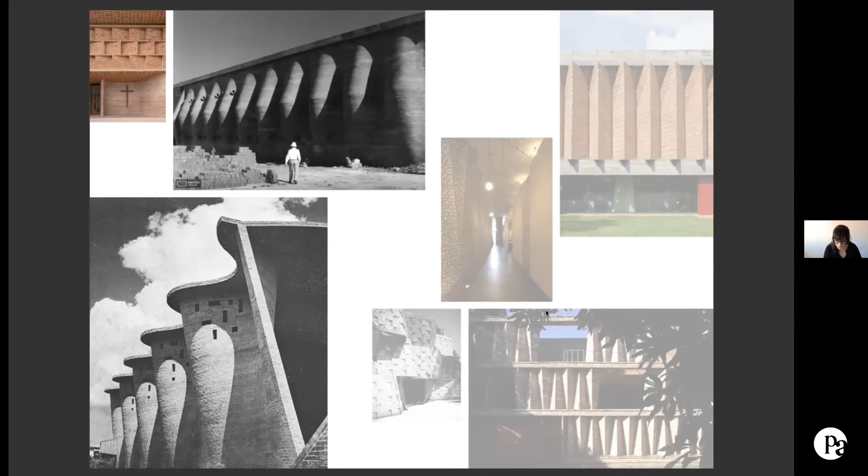...Benitez and Cabral prefer folded walls made with rectangular, triangular, or trapezoidal panels prefabricated with shiner brick. Dieste's curved planes are load-bearing, whereas the pleated plates of Benitez and Cabral are veneer masonry for concrete structures or internal walls that divide spaces. Examples include the pre-molded plates of the inner courtyard at the Center for Retired Banking Employees of Paraguay, the internal zigzag wall of the Unilever headquarters, the contrasting folds on the facade of Smeraldina House and on the corridor of Lazanita's house, or yet the pleated closure of the hydrotherapy building at the Teletón Children's Rehabilitation Center.

Throughout more than 50 years of work, Dieste designed and calculated a large number of curved and folded elements in reinforced ceramics to overcome large spans and cover ground floor buildings.

Except for the folded plates that cover the San Pedro Church in Durazno, most of these roofs are self-supporting shells with double curved walls, as those of the church in Atlântida.

Others have sheds that cover the producers' pavilions at the Ceasa Market in Porto Alegre, or barrel vaults as those of the Merchants Pavilion, and ones supported by central pillars of the portico at Ceasa and at the Salto Municipal Bus Terminal.

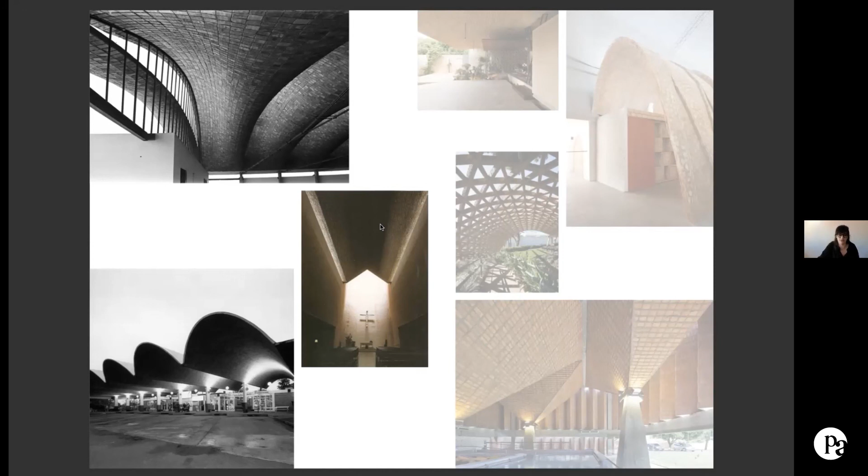There are at least three types of roofing in Benitez and Cabral projects: the flat or slightly curved slabs, as the concave with tilted bricks at the Buffon House, and those with broken bricks from Teleton.

The vaulted roofs, whose section is usually an arc that moves in one direction, include prefabricated triangular elements that cover the access and front gardens, or cast-in-place concrete and pieces of brick inside the physical therapy block at Teleton. Finally, the folded type, as the inverted pyramids at the same project.

The brick is shattered to cover the base of the wooden molds that shape the concrete, plays the role of light aggregate in the hollow core slabs, or appears in precast elements that work as permanent mold for concrete on coffered slabs and curved roofs.

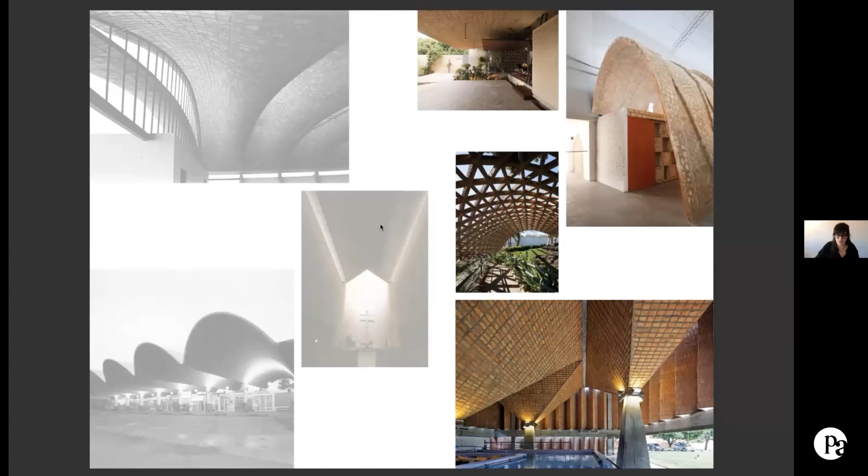Unlike ceramic cobogós, in which the grid is made with pieces manufactured for this purpose, in the Dieste and Benitez Cabral projects, the voided surfaces are made with common brick.

In some cases, the opening grain is given by the size of the brick. In others, the grain results from combining bricks with elements of different geometries, usually prefabricated on the construction site.

In addition to controlling visual permeability and sunlight incidence in interior spaces, this plastic operation highlights the countless possibilities of brick.

Except for the lancet window of the church in Durazno, the voided surfaces stand out in Dieste's production when it comes to reservoir towers, bells, and communication equipment.

In this case, these perforations are not just plastic operations, but have at least one important practical function in minimizing the impact of winds on the structural system of the towers.

In the cylinders and truncated cones, the suppression of ceramic elements makes even more evident the fine grain of the handmade work of brick bonding.

In the pavilion buildings, Dieste prefers large opaque ceramic planes that let light in through small perforations or narrow openings, as the gap between the pleated surfaces covering the San Pedro Church, or the small rectangles on the wave side walls and inclined panels of the main facade of Cristo Obrero Church.

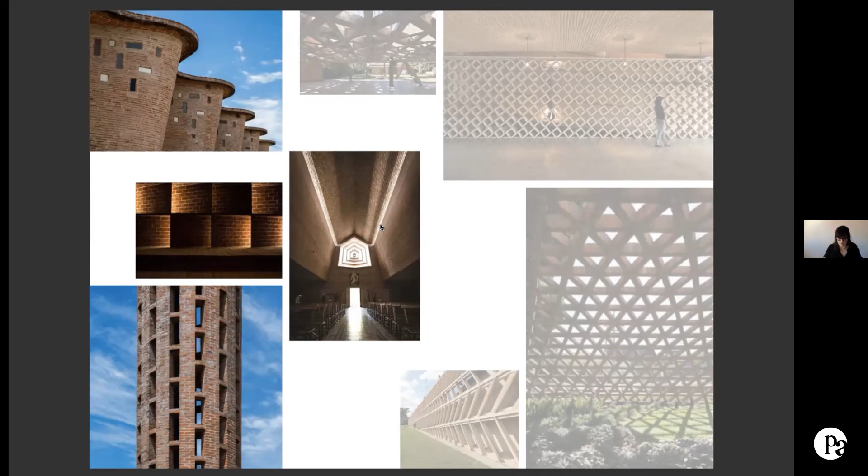On the other hand, Benitez and Cabral prefer uniform grids of small prefabricated brick elements, as the large lattice that covered the longitudinal facades of the Unilever building, the wall separating the ramp from the living room at the Buffon House, and the two voided vaulted structures at Teleton.

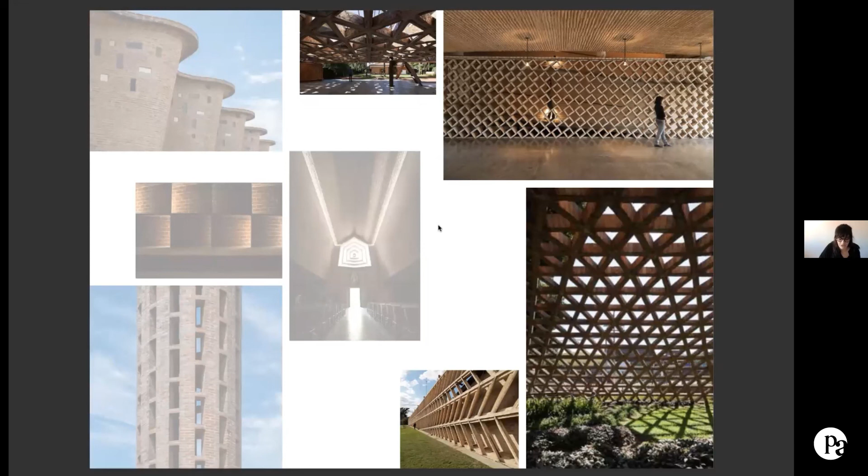The extensive use of folded and curved walls and roofs makes clear Benitez and Cabral's intention to achieve structural system stability by shape, in an effort to overcome construction limitations of brick and optimize material resources—a clear reference to Dieste's practice based on the relationship between geometry and material resistance.

However, despite the similarity in the use of brick in complex and unusual composition operations and structural systems, they differ mainly in the typologies of buildings, geometrical procedures, and structural calculation methodology.

Most of Dieste's work are pavilions for factories, churches, gymnasiums, warehouses, shopping malls, and other programs consistent with long spans covered by reinforced ceramic roofs. The work of Gabinete de Arquitetura includes houses and institutional buildings that reach up to four floors.

While Dieste concentrated his efforts on the use of reinforced ceramic in self-supporting shells, Benítez and Cabral make extensive use of concrete. In a few buildings of Gabinete de Arquitetura, the brick has a structural role in load-bearing walls.

In others, it is a simple veneer masonry. However, in most of them, the brick works as a complement to concrete structures, acting as light aggregate, as permanent formwork, or still helping to resist compression efforts.

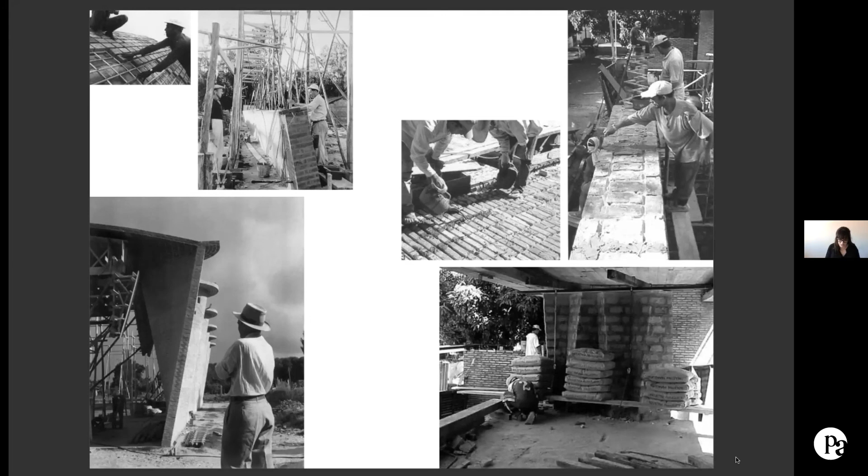While Dieste uses the full-sized stretcher or shiner brick, Benítez and Cabral often tilt it, break it in half, or smash it, and lay it with generous joints of protruding mortar.

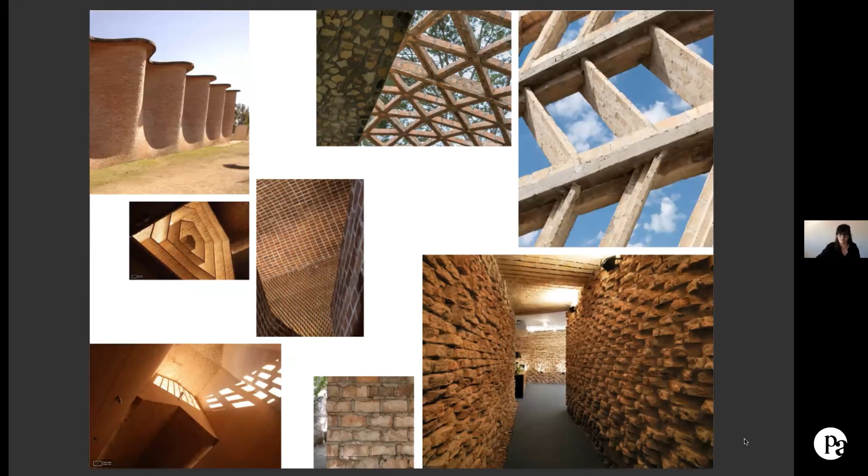Benítez studied architecture in the 80s. While in some countries of Latin America, such as Brazil and Chile, this was a period of positive review of the modern movement by specialized critics, in Paraguay this decade was the culmination of the crisis of modern architecture, which was already sparsely represented in the country. So for architects who graduated in Paraguay in the 80s, the modern source was much more in foreign productions than in works built locally.

Although it's possible to point out Dieste's reference to the work of Benítez and Cabral, probably the main similarity lies in the confidence placed in the potential of ceramic brick and the desire to break the technical limitations of this popular, cheap, and widely known material, taking from it its under-suspicion status and giving it the possibility to shape plastically expressive architectural elements in which it does not usually appear.

Moreover, the dissimilarities, instead of putting one production in opposition to the other, evidence the inclusiveness and diversity of modern architecture, a formal system that still admits expansion.

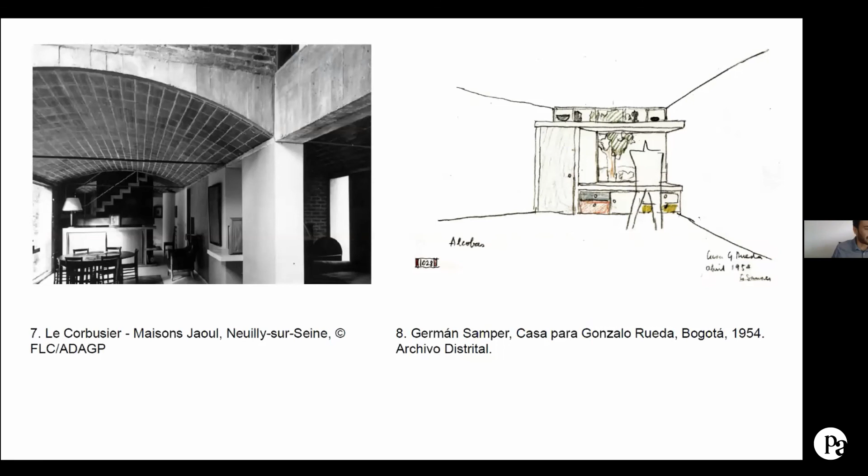Samper studied architecture in the newly built Faculty of Architecture of the Universidad Nacional in Bogotá, the White City, as it was popularly known, designed by German architect Leopold Rother, who was also one of his teachers. Of great influence was also another of his teachers, Gabriel Serrano, a prolific architect and engineer who maybe also taught him learning architecture through drawing.

Serrano made a trip to Brazil to learn from its modern architecture in 1948, bringing with him even a Portinari tile mural. His article published in Proa in 1948 shows his observations and learnings in a sort of Corbusian way.

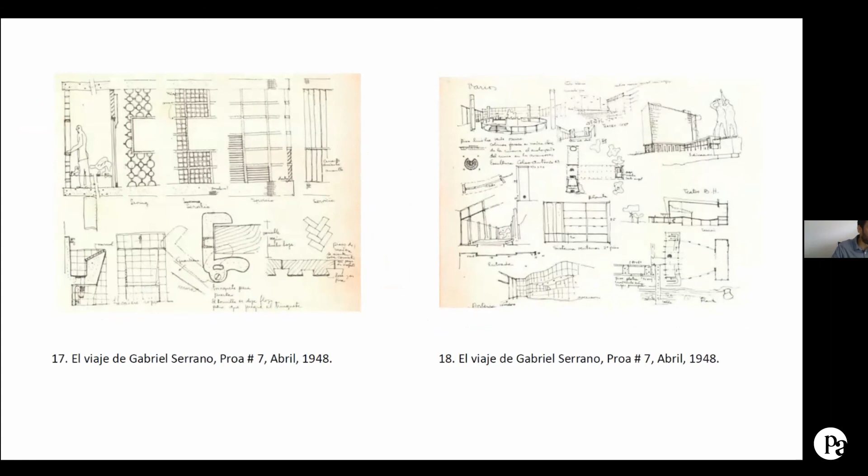This was also a time of the riots in Bogotá after the murder of populist leader Jorge Eliécer Gaitán on the 9th of April, 1948, and also the time of Le Corbusier's urban planning for Bogotá.

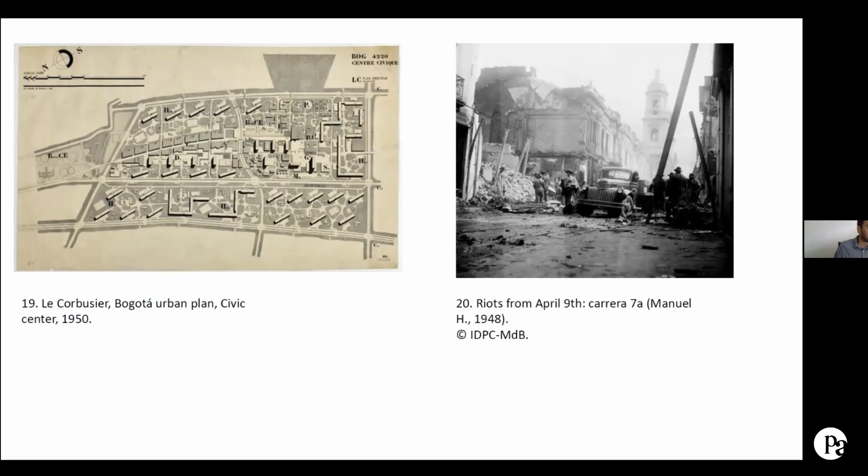One can see a very rigorous application of Serrano's method from his arrival in Paris and throughout his more than 1,000 drawings made during his stay in Le Corbusier's atelier.

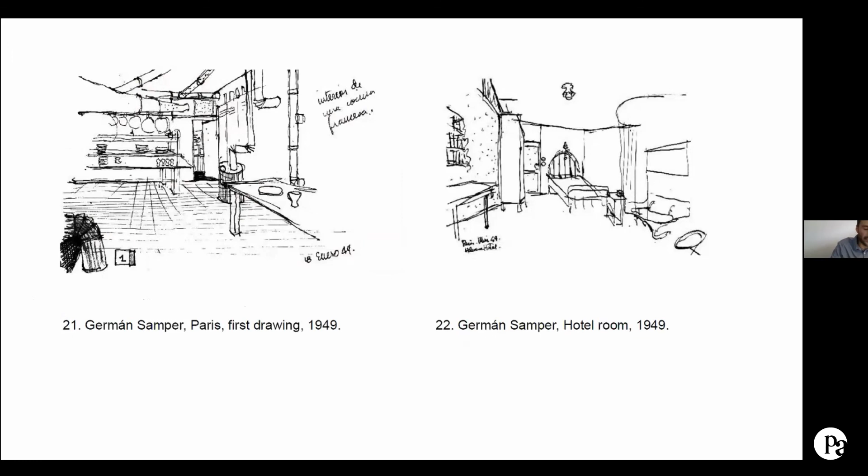Before his acceptance in the Atelier Rue de Sèvres, he met Rogelio Salmona and Georges Candilis, to whom he volunteered in the preparation of the CIAM in Bergamo, led by ASCORAL, or the French CIAM.

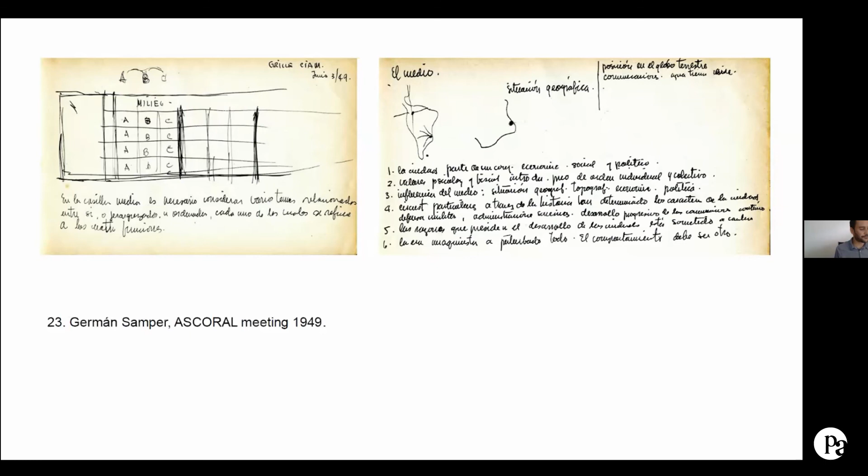In this image, we can see Samper drawing the Congress template in his notebooks, centered on architecture's relation to its milieu, or environment, and Samper making his approximation from South America. This was the introduction of the term habitat in CIAM's vocabulary.

But with an abundance of drawings, after his return from Europe, he chooses to publish the ones from his honeymoon trip to the Balearic Islands. In his article, he focuses on the courtyard or patio of traditional houses, as can be seen in these intermediate spaces of Ibizan farms. And in his text he starts by saying, the real interest lies in peasant architecture.

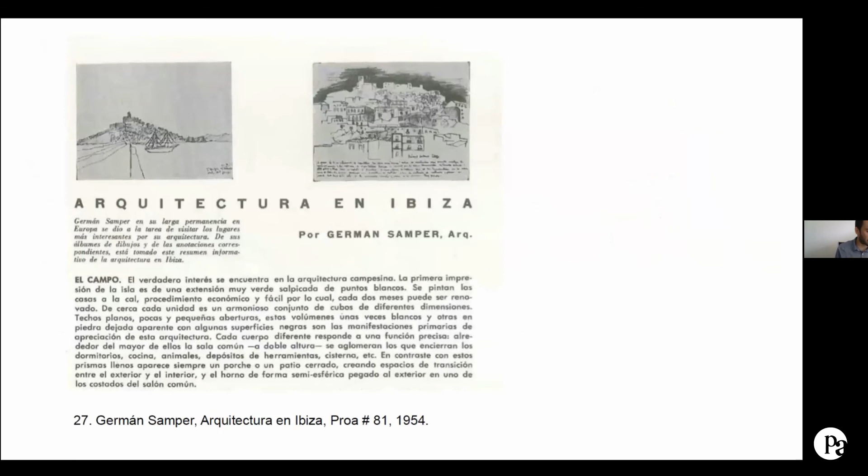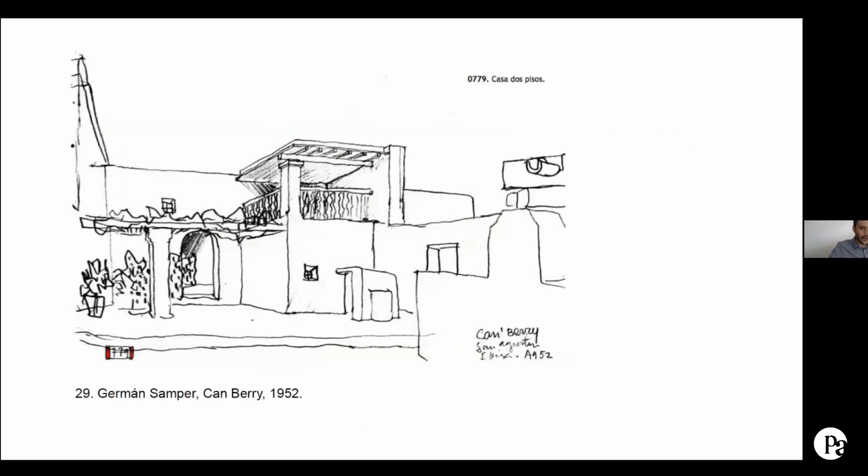This is a larger image from one of the Ibizan courtyard houses called Can Berry. And here, Can Berry, and here we can see the town where he stayed, named San Agustín, and the house where the couple stayed for 2 months, whose owner was Magdalena.

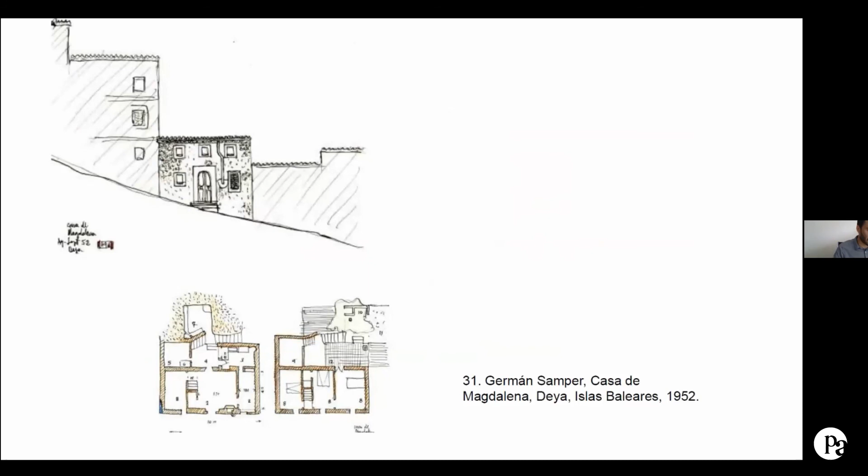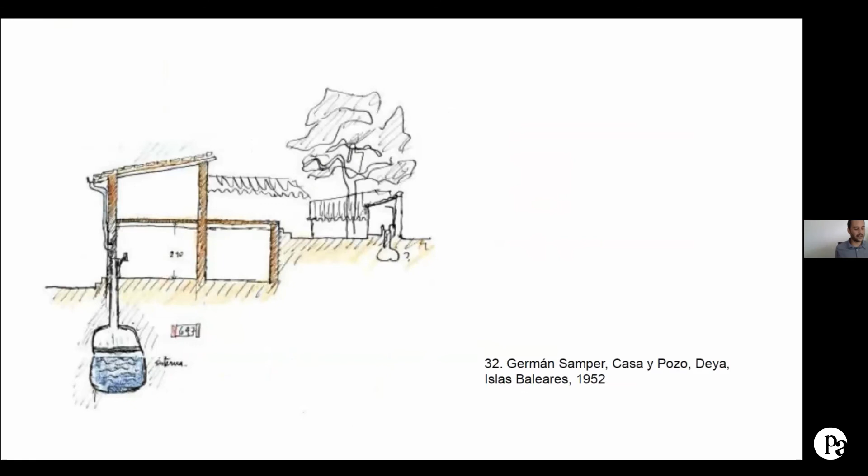He also points out that it was José, the bricklayer, who explains to him that the house begins with the water well. This is a great lesson in sustainability, which was ahead of its time.

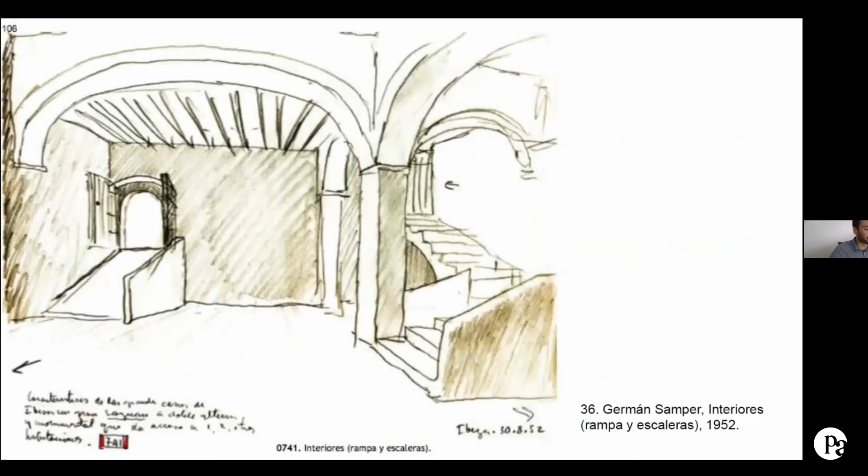But also the house relationship to its immediate surroundings and ways of communication. This here, marked D, is a street and is a way of communicating. It's not the sea, like maybe you think.

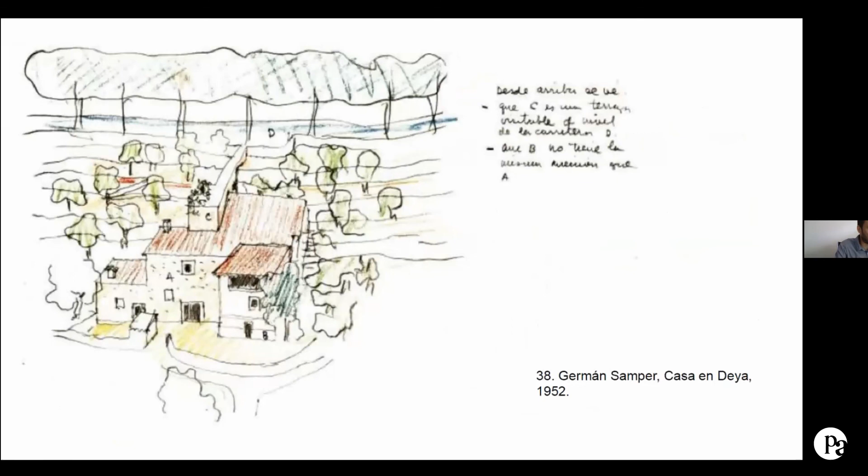At his return to Bogota in 1954, Samper designed this collective housing for the Banco Central Hipotecario in Cúcuta.

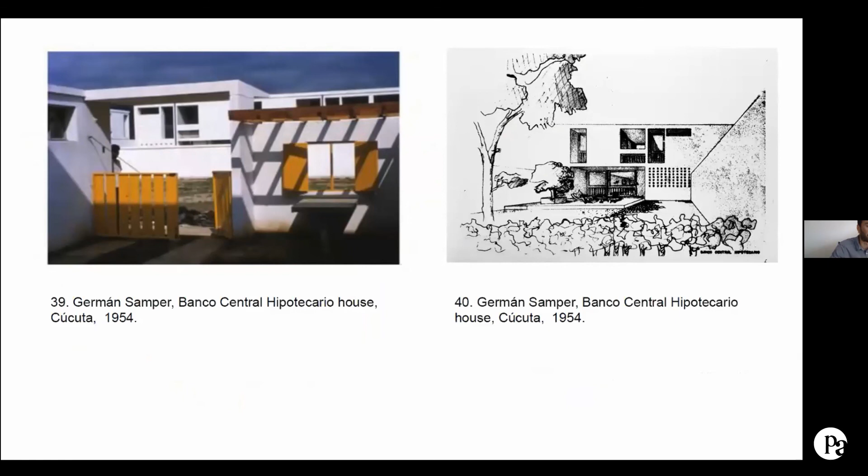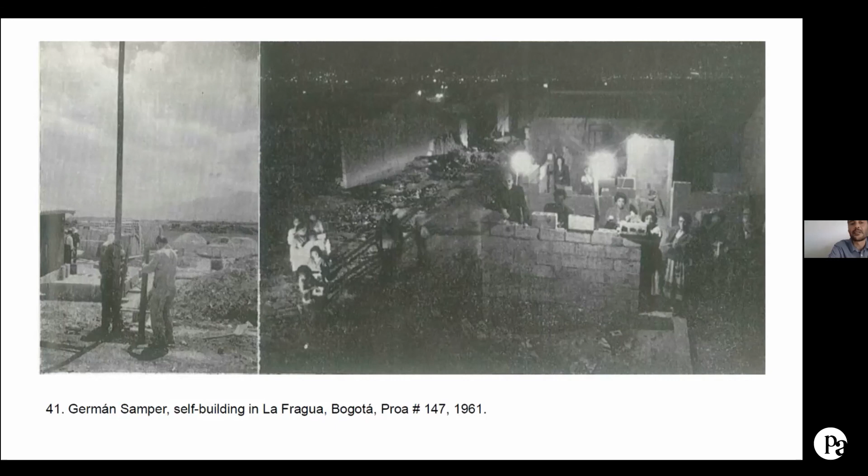The self-building project La Fragua in Bogota began in 1956 with the idea of Samper and his wife, to make organized and owned tenant houses with a maximum area of 30 square meters. In 1958, Angel Maria Lopez, the family's driver, asked the couple to help build his own house, and they told him to get other families interested also in self-building, and they made a solidarity construction during weekends and nights.

The urban approach to La Fragua begins with breaking up the monotonous row houses to generate unity in variety. Paired houses rotate in different positions, allowing intermediate spaces to evolve, gradually reducing the road sections from motorways to pedestrian paths and small plazas.

The sections between houses in this drawing are 8, 5, and 3, but afterwards in the Proa magazines, the distances between houses are 5 and 3.5 meters.

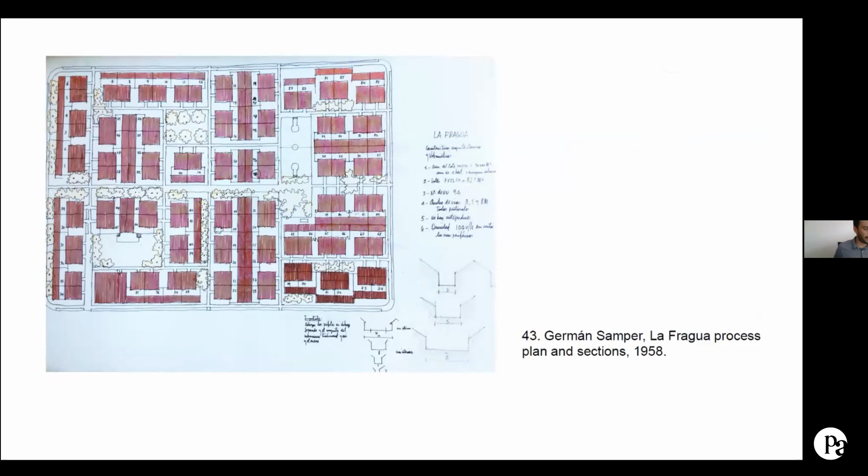The houses have 2 entries, one for the household and another for a free development, workshop, or renting space.

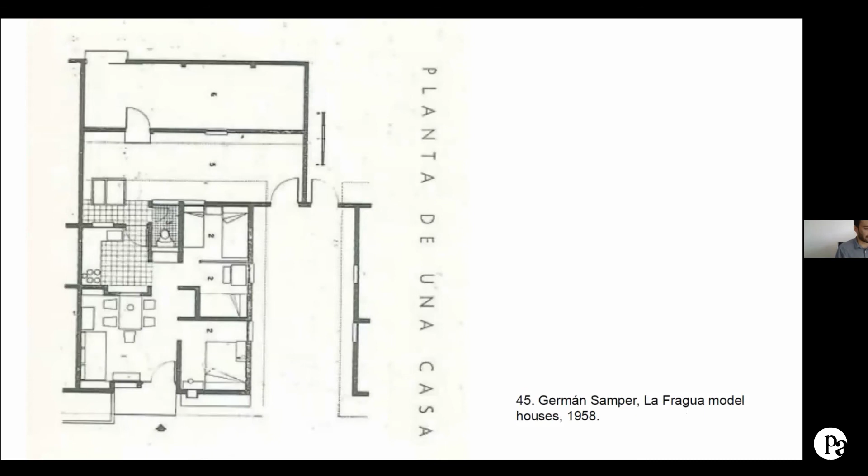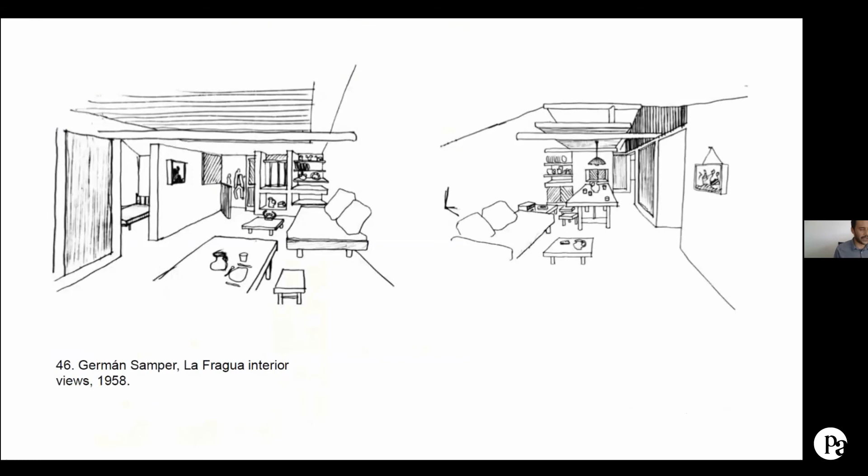The facade is an in-between space in itself. Outside there is a bench, an entry platform, a tripod, and a window. Inside, the facade becomes a shelf, and there is even a half-closed door or an intermediate door - I don't know how to call it.

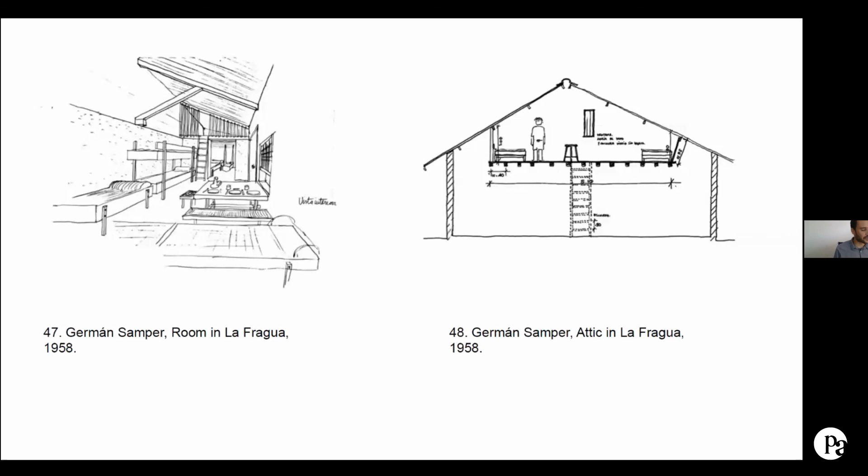The attic is another intermediate space, perhaps of great symbolic importance as a receptacle for creativity. Finally, we see the backyard serving as a connection between the houses and their surroundings. This here is a workshop, and this here can be a classroom.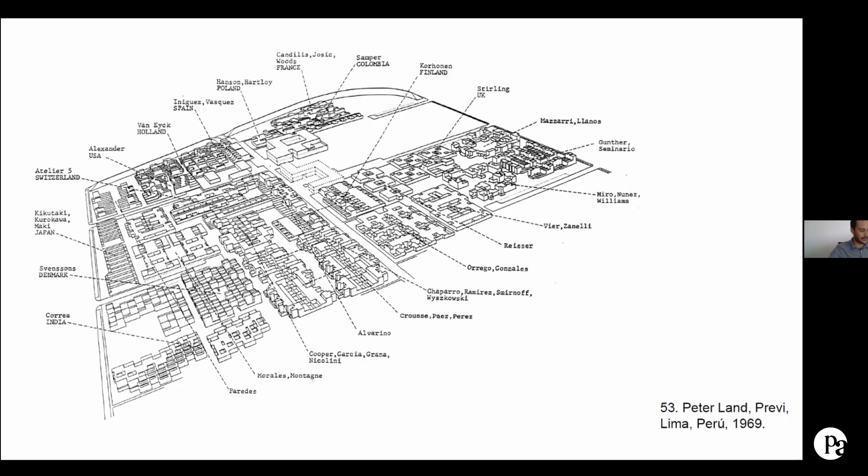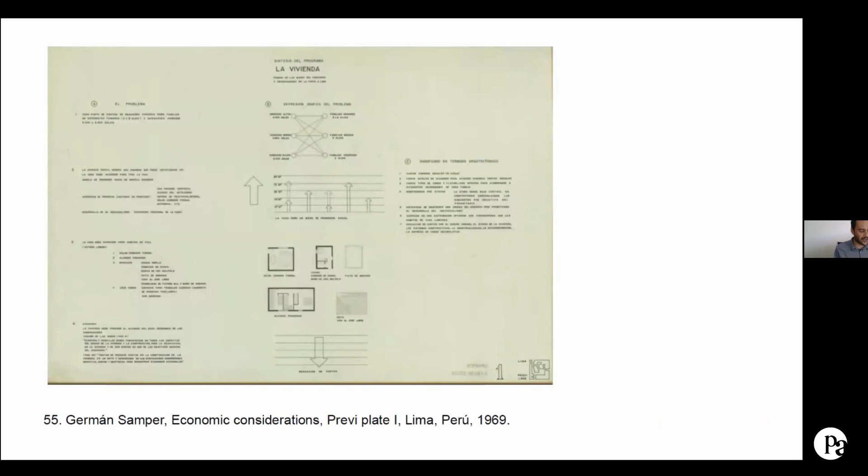The constructed houses, or the first plates, show an economic analysis of Peruvian housing styles, suggesting the house also as a means of social promotion and better living. He reviews the traditional Corralón Limeño, a collective housing in Lima within a sole street or pedestrian path.

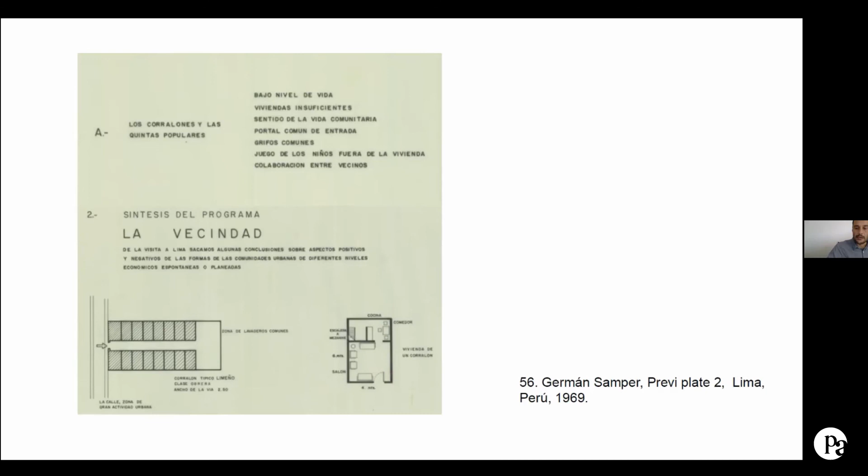Samper also draws lessons from the upper-class quintas from the 19th century and shows the advantages and disadvantages of that style of planning.

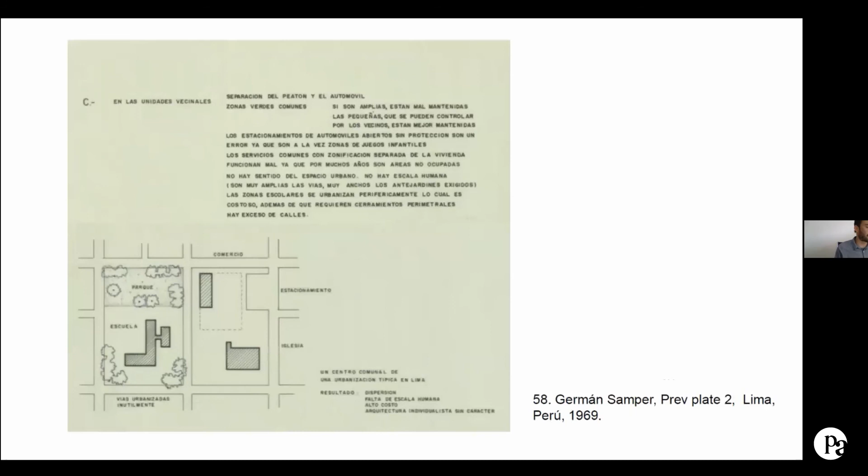But principally, he draws examples from the Quinta Heeren. He explains the villa, it's a 19th century villa, as a fine example of an urban interior space, providing public intimacy, lost in most traditional spaces.

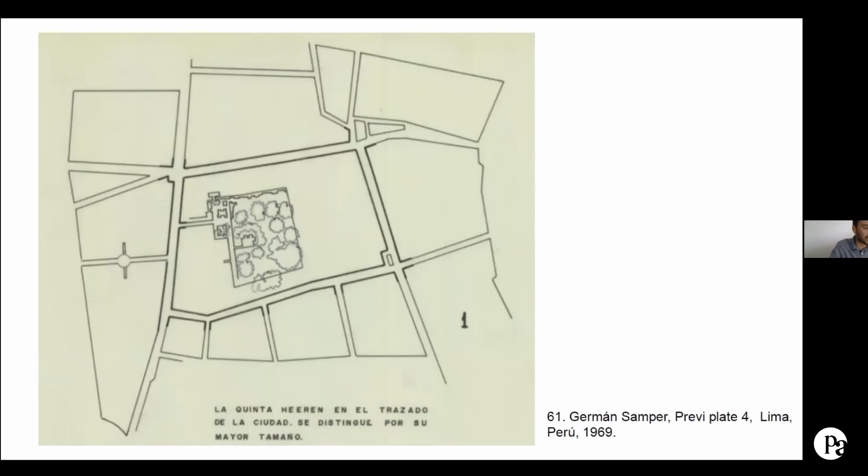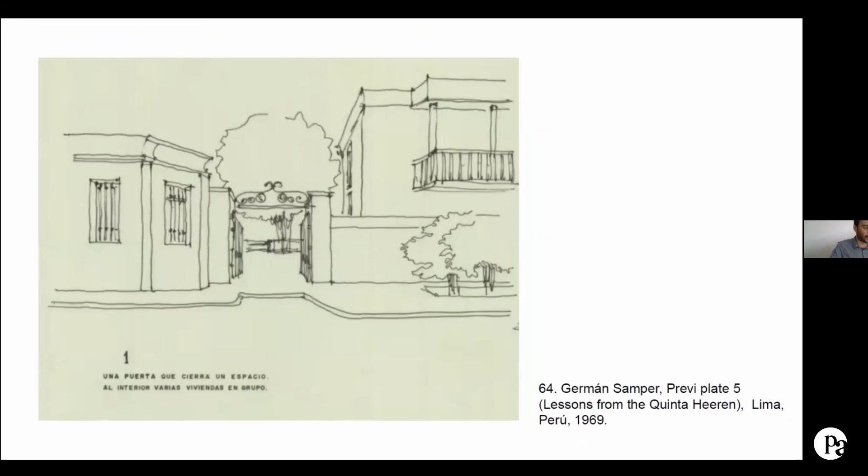And he makes a sort of architectural promenade of these spaces. In one, he says a door that encloses a space inside several groups of homes. Through a narrower entrance, a central space is discovered.

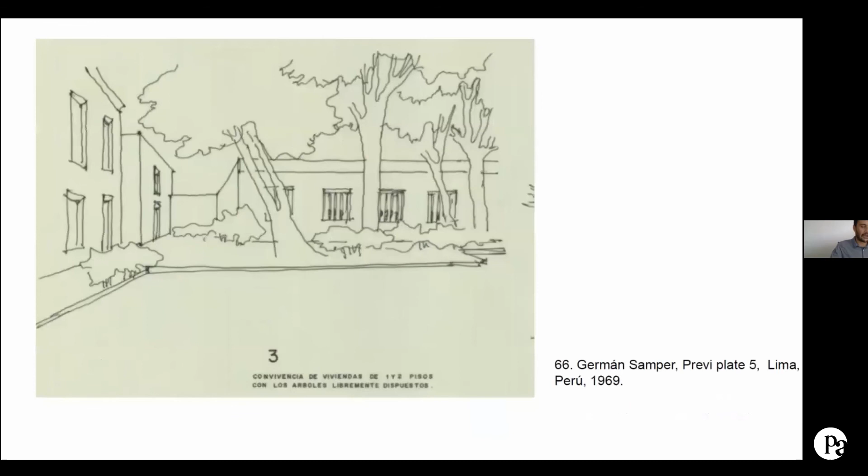Coexistence of 1- and 2-story houses, human scale in all spaces, fine relation between constructed and open spaces. And through broken perimeters, the spaces are closed discreetly, hinting at a continuity.

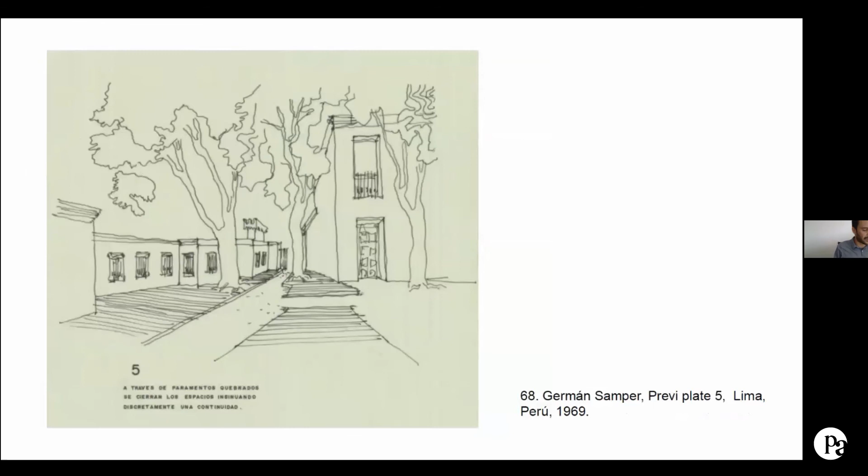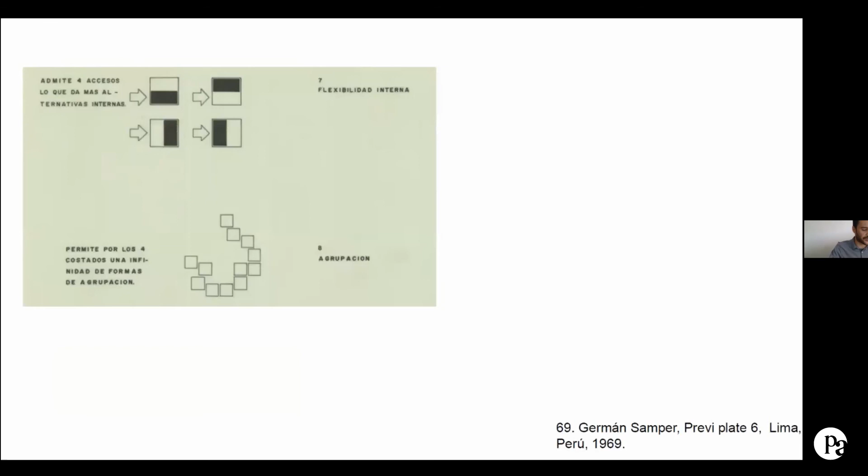I will speed up a little bit. He chooses a square lot of 100 meters because, as he says, it has many advantages in flexibility, not only inside but outside. The square admits more access points, which provides more internal possibilities. And finally, the square admits on its 4 sides an infinity of ways of grouping.

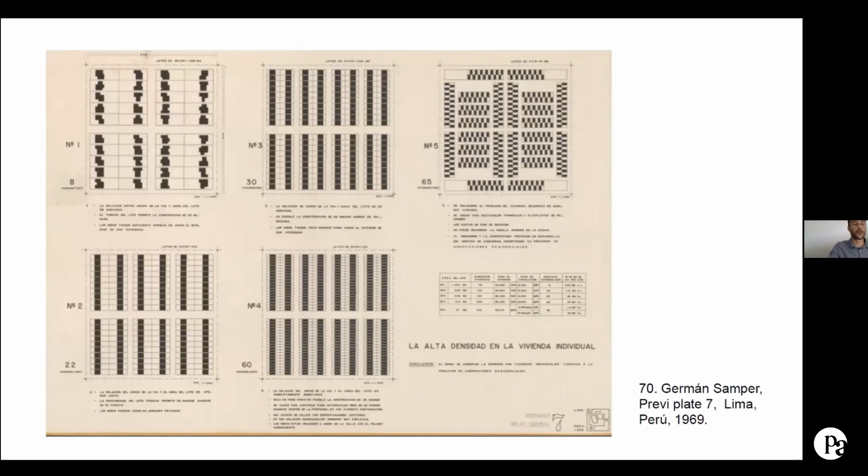He makes these tryouts and settles for the final image, number 5. As in La Fragua, he gradually reduces the street sections, and we can see a similar layout as in La Fragua.

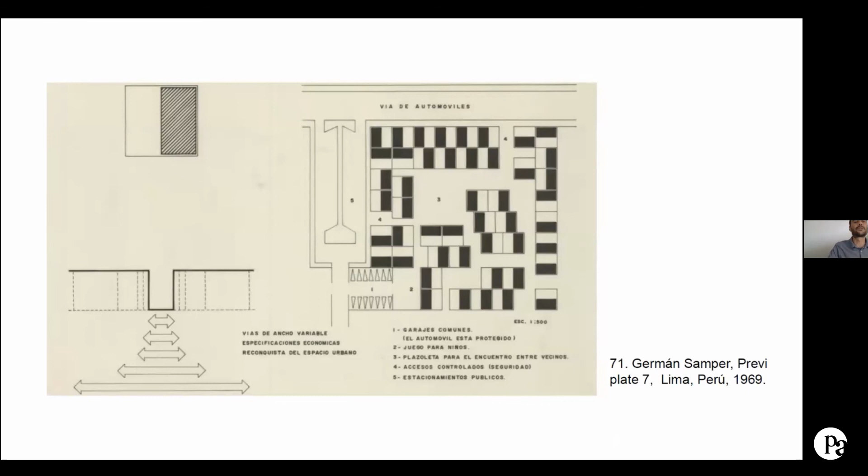I'm going to speed up a little bit. I think the only difference we can make with La Fragua is this group of houses has a gate. It's a closed public space, so I think it's one of the greatest differences. He says it's Lima's way to close spaces with gates.

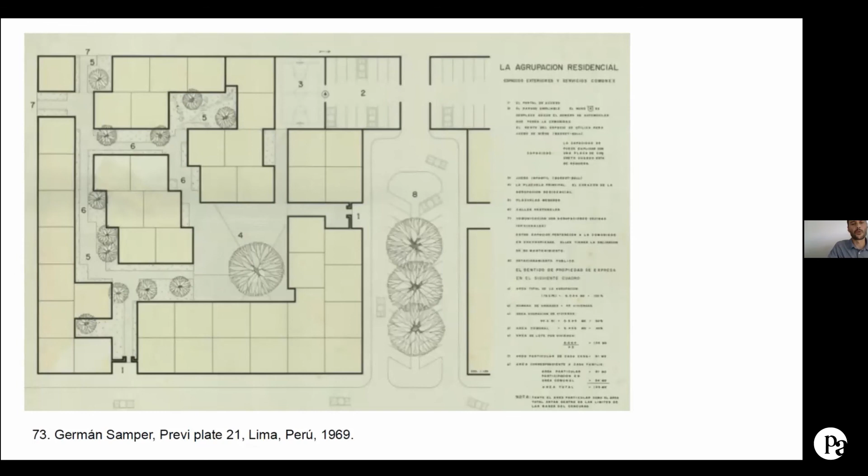He makes 5 typologies, and I'm just going to finish with the spaces he chooses for these typologies. They all are based on Lima's habits. First, a living room, a kitchen, a bathroom, and a space disposable for workshop or rental.

But principally, what he chooses is the house is generated towards a patio that permits life outside, the outdoor life inside a patio, and relations between all the spaces involved.

I think I passed my 15 minutes, but you can see here images of the type 1 house centered around the patio, with another patio on the second level where there is a kind of voyeur, a person not so much regarding landscape, but his community, I think, outside.

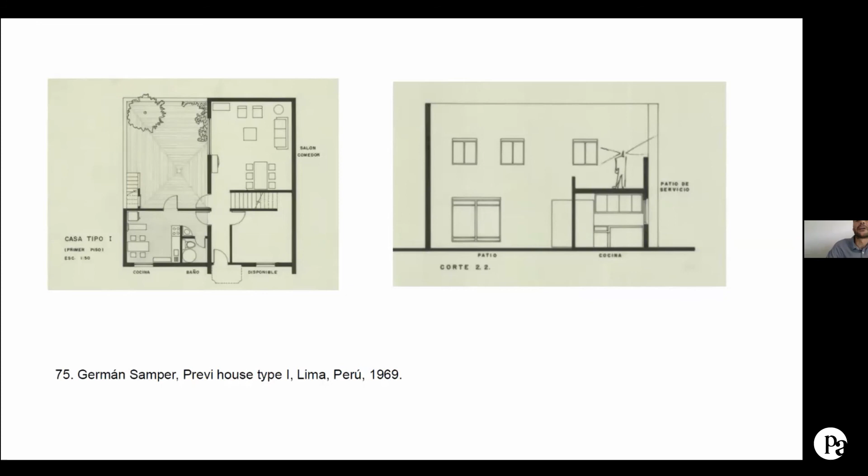So I will leave it there with these images that maybe provide you with more interpretations of intermediate spaces in Samper's work. Thank you very much.

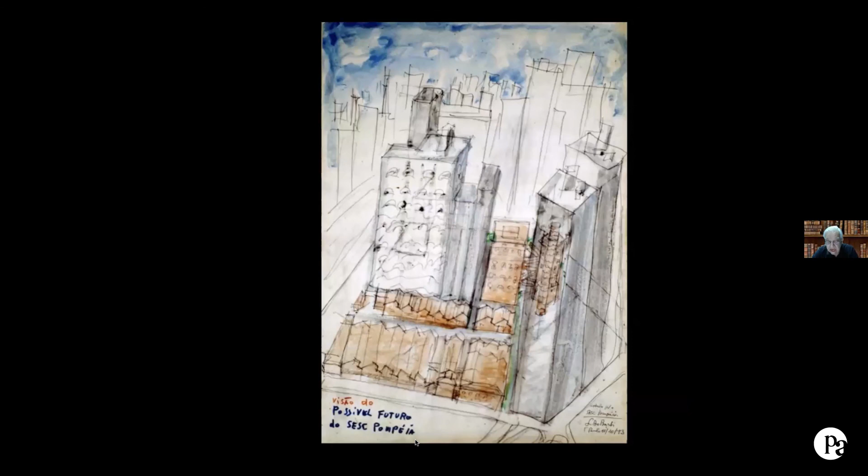The L-shaped parcel fuses a corner lot with an alley between sheds and a through lot where a creek runs from one front to another. Bo Bardi had a clear notion of the future.

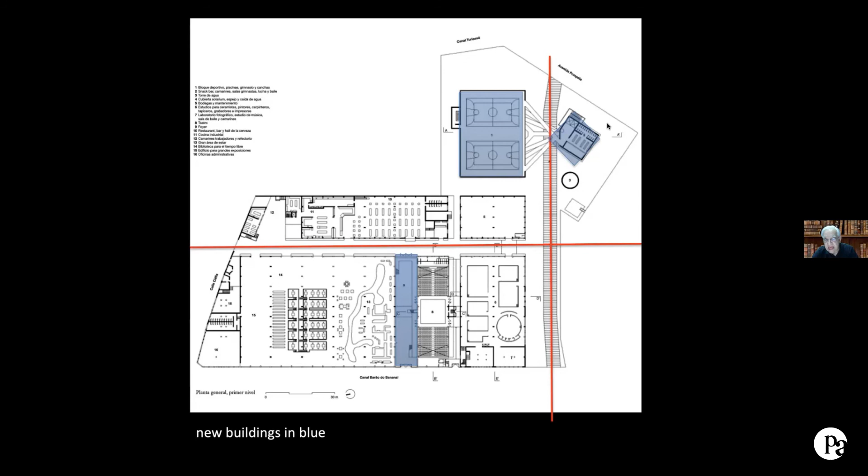The creek was covered by a boardwalk running all the way through. Bo Bardi replaced clay tiles by translucent tiles at the covered plaza, and the sheds became intimate shelters, including a tribute to Niemeyer's curves. The alley kept its granite pavers, but plaster was removed from the existing walls and brick exposed.

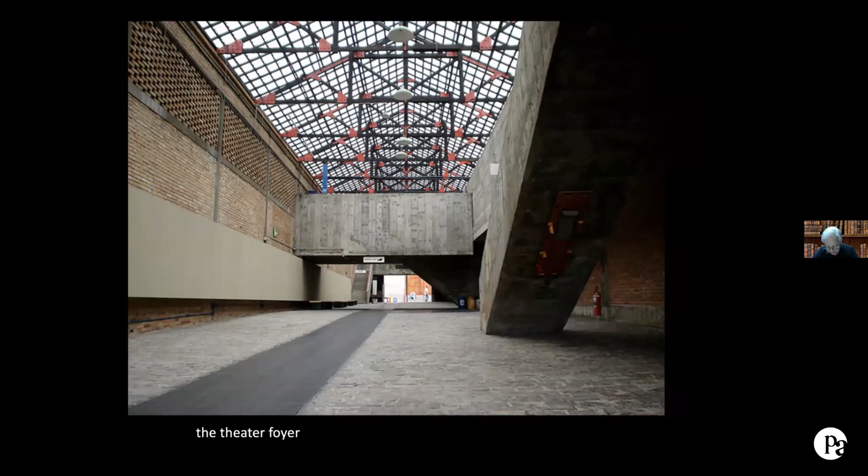Concrete after Vilanova Artigas, same pavers as the alley, and a translucent roof distinguished the theater foyer. Bo Bardi designed the furniture for all public spaces. Comfort is a bourgeois notion, she said. So people stand up and dance.

Workshops come in different configurations, and the towers resemble their neighbors in silhouette, but not in fenestration. We see brick rooftops, gray walls, bloody red windows, and two fortresses that figure entangled warriors, walkways as spears. The towers watch over the boardwalk, working as a beach equipment.

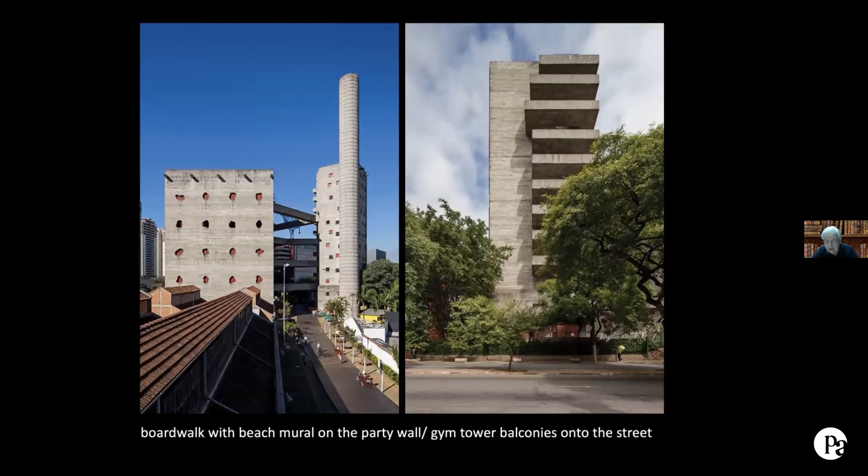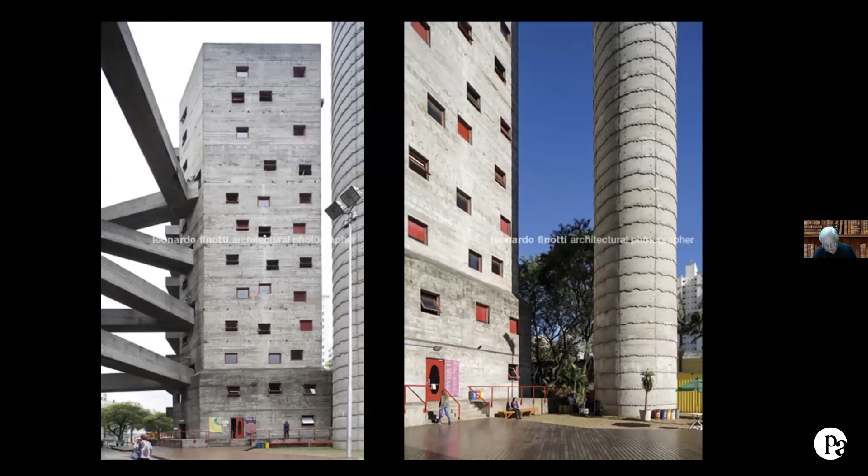Irregularly spaced balconies also signal difference. Walkways have a view. They are near symmetrical, as befits a good Persian carpet. The gym tower is pentagonal in plan, slightly protuberant below, castle-like.

The water tower appears as a giant candle, homage to Barragan, Lina said. At the pool, the clear span of 40 by 40 meters is not for the faint-hearted. And the courts are painted in bright, kitschy colors.

Mendes da Rocha recycled a 12-story high Art Deco department store in a square corner lot.

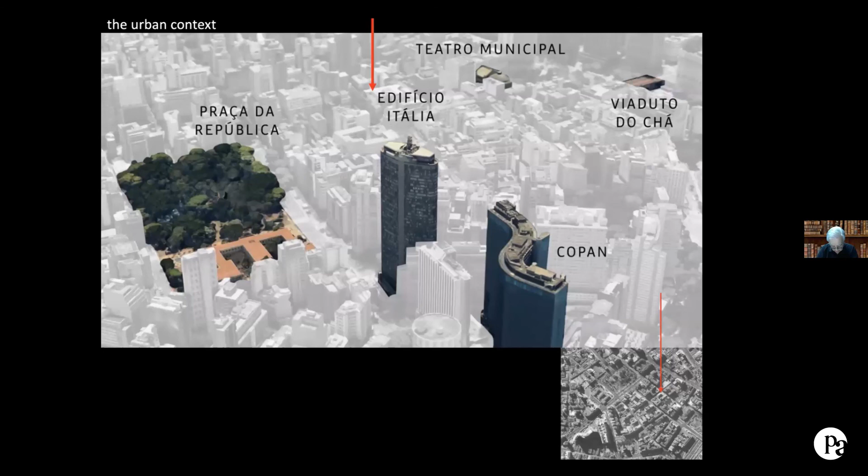At the heart of downtown.

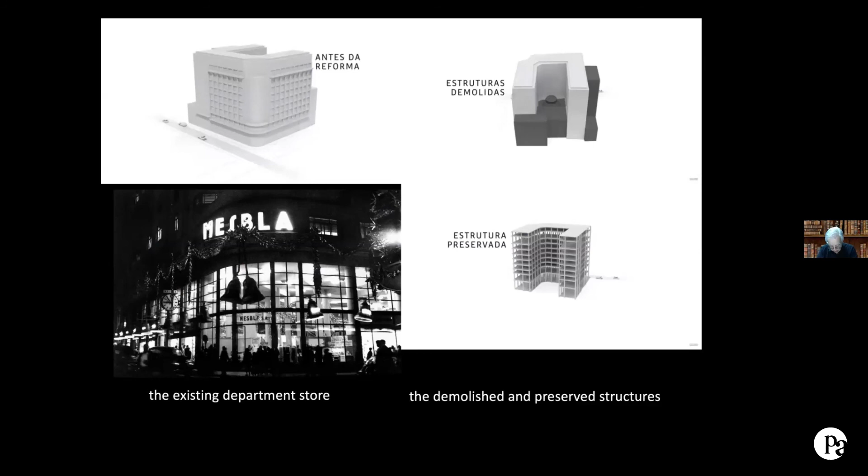He stripped the store to its bones and added...

Are you seeing the full figure here? Yes, we see it, the full one. Yes, because I have your faces above them. We see four images now, in one slide. Okay, fine, very good.

He added a pool at the rooftop, a theater at the basement, introducing some double height spaces in between. The ground, 4th and 12th floors are left open to the public, as three types of public lounges.

Zoning is straightforward. There are four floors of public facilities below, topped by the cultural block. Then there is a floor of dental service, the sports blocks, and a pool-related block at the end. Each block has three floors.

The building next door was bought and demolished, giving way to a service tower. Ramps and elevators were added along the internal lot lines of the original parcel, and horizontal slits...

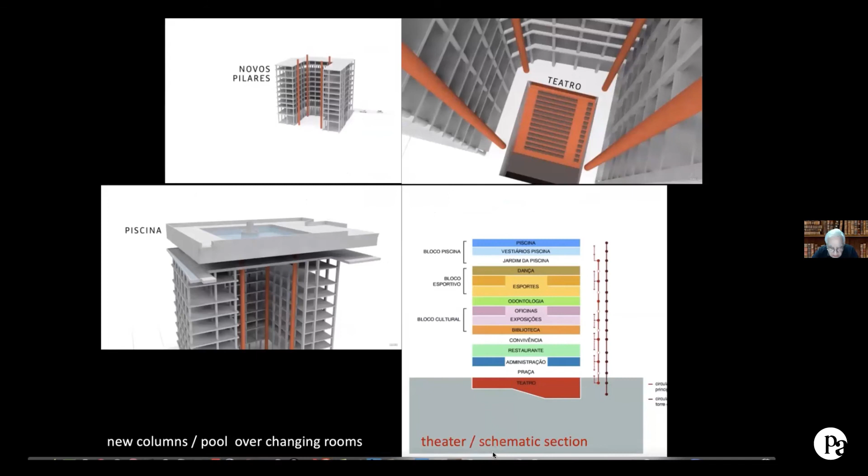Horizontal slits correspond to the public lounges and the sports block. Vertical slits correspond to the 4th floor public lounge and to the sports block.

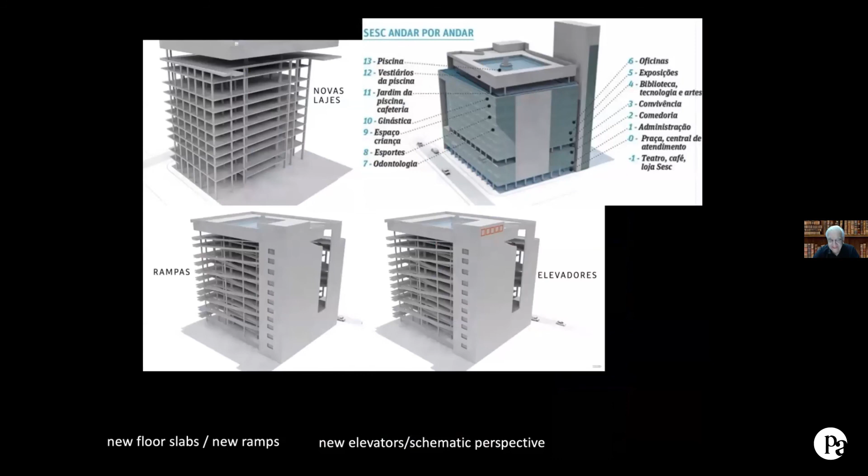No, come on. Sorry, I'm making this a mess. It's okay, we're following you. Okay, so, okay, well, you get the picture.

There is everything. Oh, come on! Every time I use the mouse, I'm nervous.

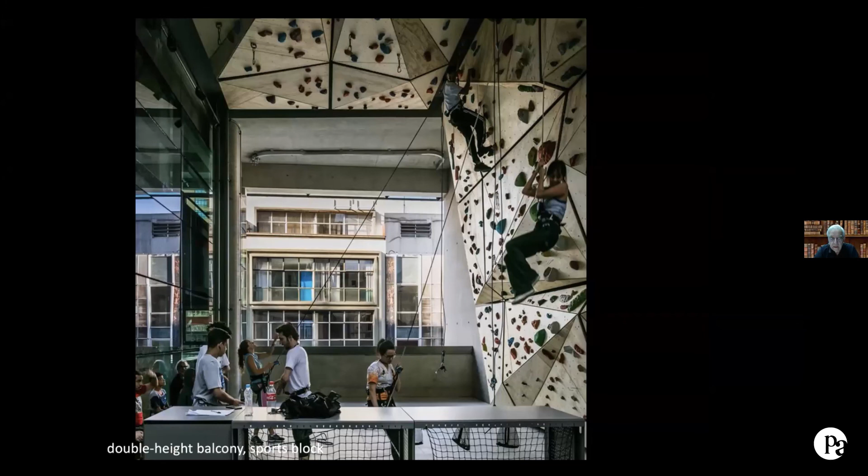I wonder why it doesn't. Sometimes it doesn't.

This is looking down from the pool garden to the sports balcony. There is a slit at that part of the section, between the balconies and like spaces and the circulation core.

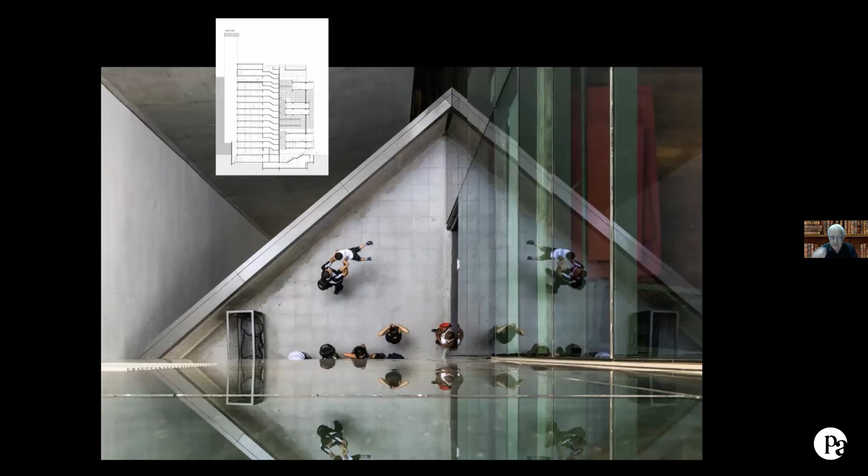So this is unexpected verticality in the whole scene.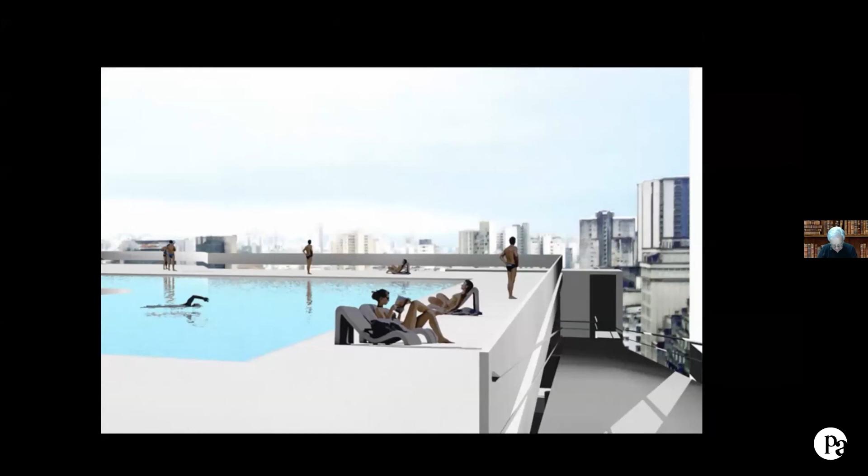And the walk ends in an open plaza where visitors and users may dream about time stopping, and everything becomes kind of luxury, calm, and voluptuousness, as in Baudelaire's poem.

The pool is 25 meters square, supported by 8 columns beside the tetrapylon, the 4 internal columns, and regular geometry rises above the skewed and imperfect hybrid existing structure, proposing an island of order and beauty among the urban wilderness.

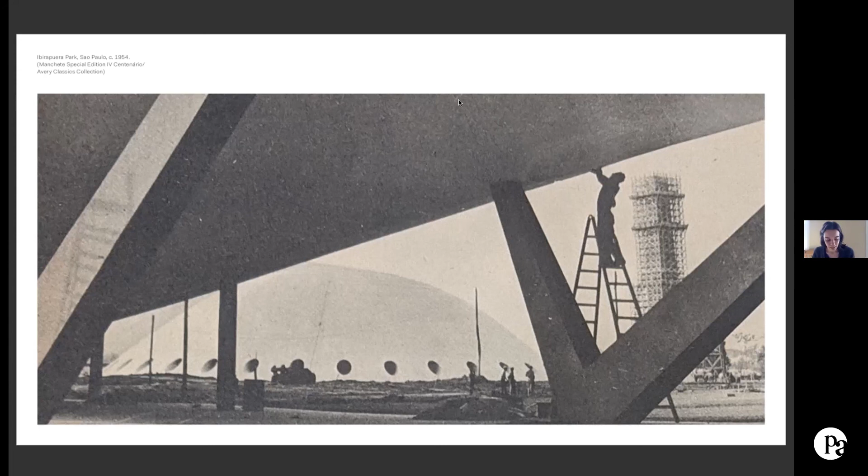This presentation will be structured in two sections. The first, One Narrative of Development, focuses on the dome's conception, both in Lebanon and Brazil. The second section deals with the afterlives of this project, and it's called Multiple Narratives of Appropriation. And I think Ciro Miguel is in the panel, so I just want to thank him for the photos.

One narrative of development. In 1954, an international fair took place in São Paulo as part of the year-long celebrations for the 4th centennial of the city. Ibirapuera Park was built to host the celebrations and later become an urban park in the manner of the great Western metropolises. The slogan of the event, São Paulo, the fastest growing city in the world, communicates much of the euphoria in the beginning of the 50s.

Carlos Lemos, the head of Niemeyer's office in São Paulo, spoke of the lack of specificity to the project's program of needs. Instead of a brief with the program's requirements, the guidelines for the project were to create spaces to combine, quote, everything that could amaze the world about Brazilian progress, end of quote.

If in São Paulo the fourth centennial events aim to consolidate the image of an already fast-growing metropolis, in Tripoli the International Fair was to be the starting point for the growth of the city. Located in the rural area between two urban nodes of Old Tripoli and the littoral Al-Mina, the fairgrounds were intended to generate a third centrality to connect and help increase Tripoli's urban fabric.

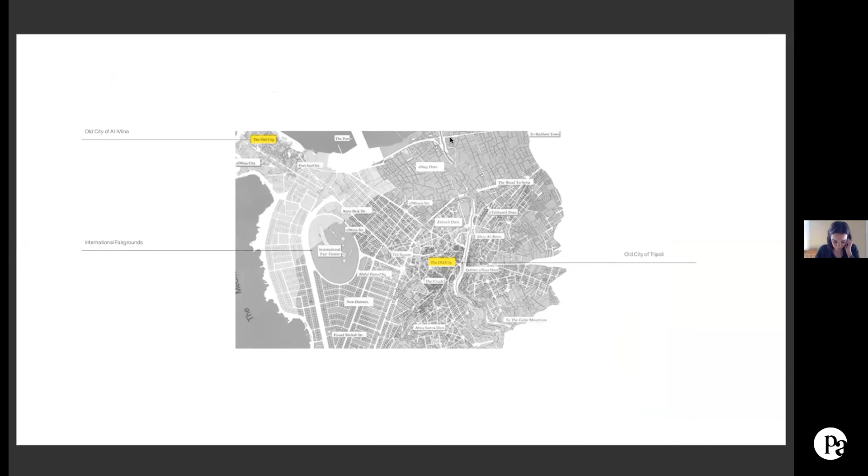The fairgrounds were part of a five-year program of administrative reforms and major construction works orchestrated by left-wing President Fouad Chehab in the so-called Golden Age of Lebanon in the 60s. Niemeyer's invitation in the name of President Chehab, 2 years after the inauguration of Brasilia, shows the president's intention to establish an unaligned kinship. After all, Niemeyer iconized a modern architecture detached to, but still in close dialogue with, the colonialist bias of the developed world. A communist Brazilian architect was a perfect fit to the ideologies of Chehab, representing the endorsement of political ideology in addition to the aesthetic ideals of modernism.

Taking press media as a main primary resource, this section inquires how developmentalism relates to the commission, the program, the architectural solution, and the language around the two projects in São Paulo and Tripoli. Even with their differences in scale, they both channeled a similar mindset, a desire to establish their countries as great nations of the world, making their way along an inexorable path towards progress.

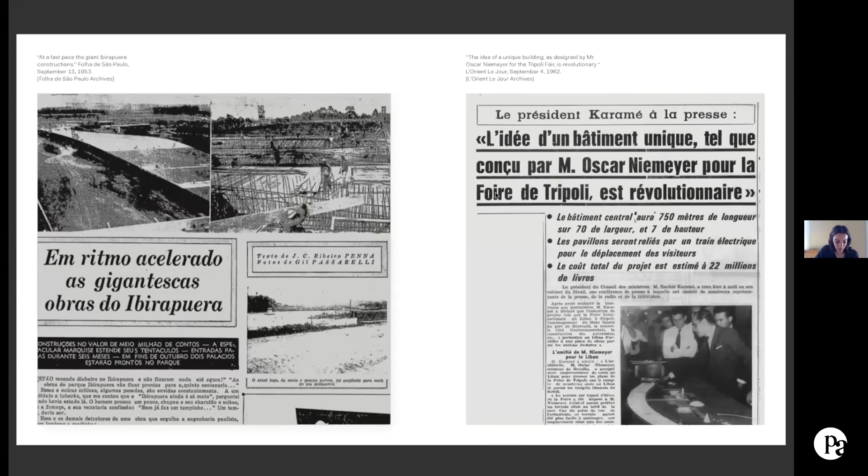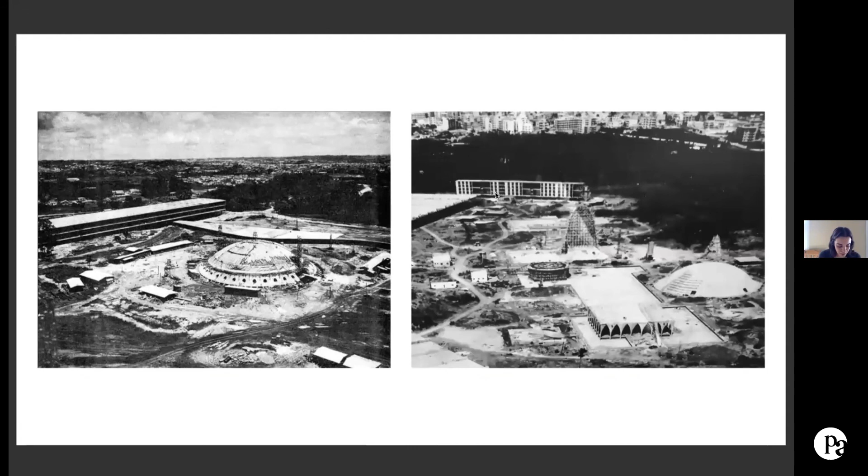In addition to ideology, these projects share multiple modernist tropes. They were publicized by stage photos of a group of all white men pointing to a big architectural model. They were expected to become the most modern construction in the world, according to local newspapers. They represented a unique technological achievement for their countries, one made possible by the large availability of unskilled labor. They also share architectural gestures, a big marquee in relation to monumental smaller units surrounded by rich vegetation with organic paths, palm trees, and a dome.

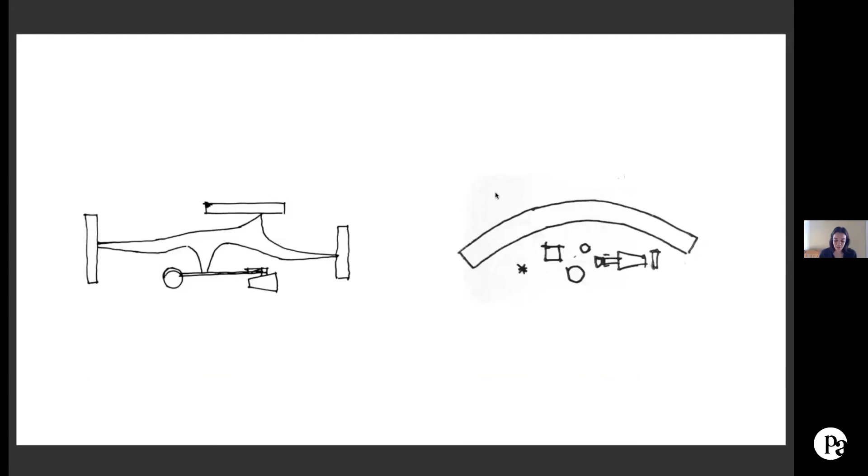And finally, they were both created to host international fairs, serving as showcases for the progress of their cities, generating real estate interest and attracting the eyes of an international audience.

Fairgrounds are perfect breeding grounds for domes. A dome requires open space for its landing, or better, it demands an environment of neutral context, a playing field of green grass. Without interaction with the city that exists in its surroundings, this architecture dissociates itself from the existing urban fabric to create a new landscape of simple lines, few colors, and legible geometry. But to open space is necessarily an act of displacement.

In the case of São Paulo, Ibirapuera Park took the place of an old indigenous land that at the time was being used by families in informal settlements. In Tripoli, the fairgrounds are built on top of private orange fields that were sold to the municipality for a very low price, a forced dispossession for the sake of progress. Progress that is translated into the image of construction, of tireless men working day and night to build modernity. The free dome on a large field speaks of the lack of roots to this architecture, that neglects internal dynamics to produce a crystallized image of future.

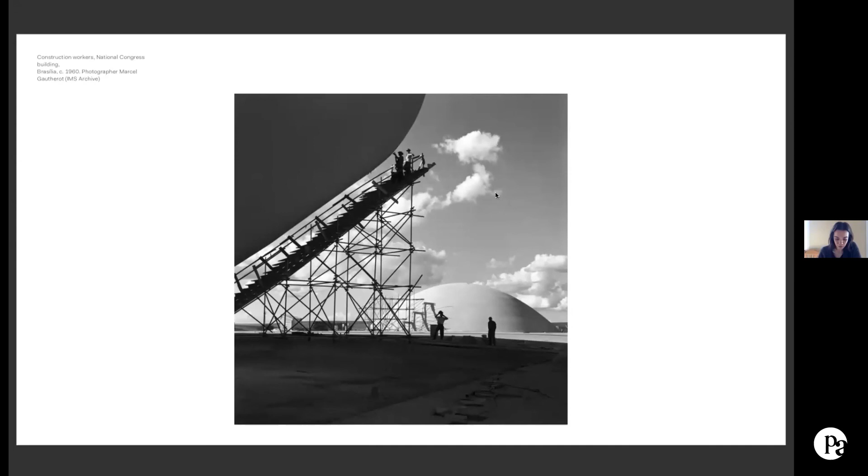The years that followed the conception of these projects dealt with several forms of interruption. After the opening of Ibirapuera, its main buildings were left empty without definite use.

In Tripoli, the process of construction of the fairgrounds extended for 12 years, with constant rescheduling and imminent financial breaks, and even then was never completed. In 1975, with the rise of the Lebanese Civil War, the site was walled and suddenly transformed into a military base, following the invasion of its premises by the Syrian army.

This unsettling nexus of development, politics, conflict, and geometry has led to multiple reprogrammings of Niemeyer's domes. The domes have been claimed and climbed upon. Their shells exist as separators of two spatial ambitions: one that is continuously trying to organize bodies within a mode of architectural space, and another that accommodates bodies in unexpected ways and triggers transgression on the outside.

I look at these emblematic cases as a way of describing the infinite possibilities of interactions with a building, semantic and programmatic. I hope to illustrate, to borrow from Anna Tsing, the multiple futures that pop in and out of possibility, to contrapose assumptions that the future is that singular direction ahead.

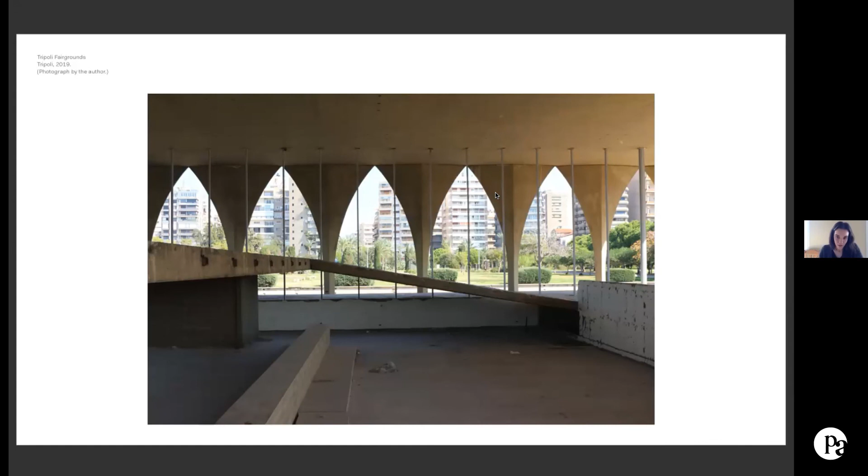Going through the entrance gate felt exactly how I had imagined. The sensations of Alia Farid's work came back instantly. Something about those buildings made me feel at home. The space, proportions, and materials are so familiar to me that I explore it as a visitor of yesteryear.

A few months later, my visit to Ibirapuera Park was somewhat melancholic. With the dissolution of the Ministry of Culture at the beginning of President Bolsonaro's mandate in January 2019, and almost no existing support for culture, I found another empty building.

Unlike the dome in Tripoli, Oca is finished and white, although not as white as I remember. The only inhabitants of that building were the properly positioned fire extinguishers, as a museum requires, but then nothing had to be shown in the museum.

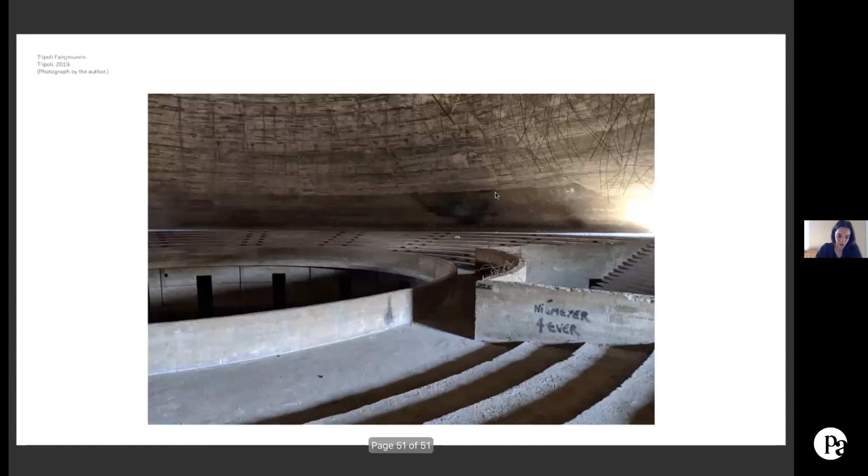Lebanon and Brazil are countries with very different stories. The Tripoli Fairgrounds and Ibirapuera Park are also significantly different spaces, but both of my travels, for some reason, were marked by absence. Spaces that haven't fulfilled their intended function, and at the same time seem to be awaiting the next occupation, the next cycle of hope.

But we don't need to guide our narratives through promises and failures. Buildings come into existence in a complex reality and change through the frictions and roughness of the lived experience. The linear future sought by the design of these projects is displaced by multiple futures of social appropriation. Thank you.